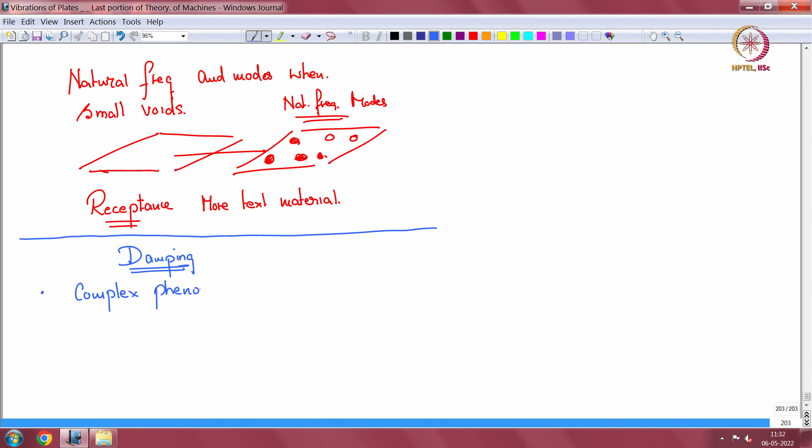Damping is a complicated, or complex, phenomenon. Let me tell you that this particular course which I am teaching, I myself learnt it from Professor Soedel. And when it came to this section on damping, he said that he came to study mechanics with the intent of figuring out what this damping phenomenon is. And then towards the end he concluded that it's a very complicated phenomenon, you cannot really nail it down. Yet it's part of all dynamical systems, and we deal with it using experiments, taking support from experiments and figuring out some empirical values. So I will put some thoughts together, because even in pure analytics you have to include some damping for meaningful results.

Now damping comes from many different directions, and you can have it coming from fluid viscosity. As you move in a high speed car you will have wind blowing against you, so there's kind of a drag that will take out energy from your mechanical system. And energy can be taken out at joints. When you have joints in a system you can have energy taken out. And you can have energy taken out from within the material.

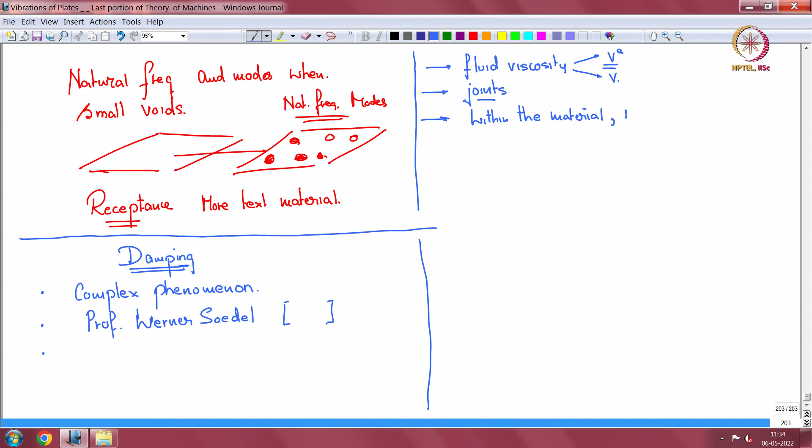Here itself there can be a nonlinear component where the damping is proportional to velocity square, or in the normal way proportional to velocity. Now there is damping within the material, which we call either internal damping or hysteretic damping.

So you have many sources of damping. The boundary conditions may not be very strict. The boundary is not strictly clamped or supported, so the boundary leaks into the neighboring material. So if a cantilever is not strictly clamped, there is energy flow into the wall. So there's many ways that damping occurs.

Now if you do a modal test, if you take a plate, suppose a simply supported plate, and you hit it with a hammer and measure it with an accelerometer, then you will see this in your frequency response function. You will see this sort of graph, plotted on a log scale. This is a frequency response function, and these are your resonances. These peaks are your resonances. The peak value and the way it rises, this region is damping dominated. This region around the peak is dominated by damping.

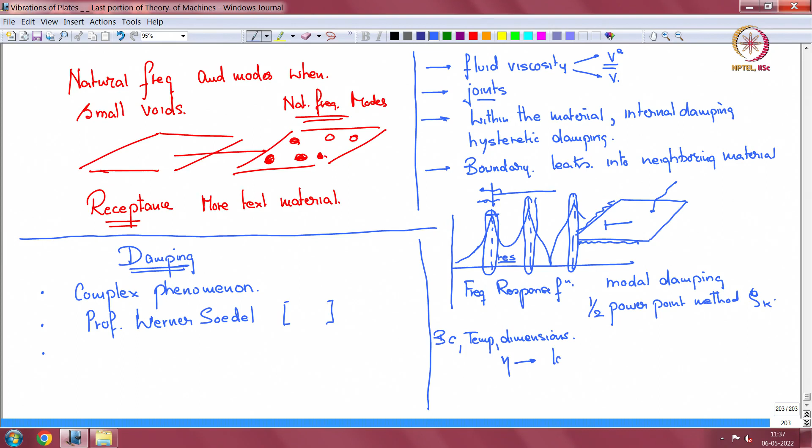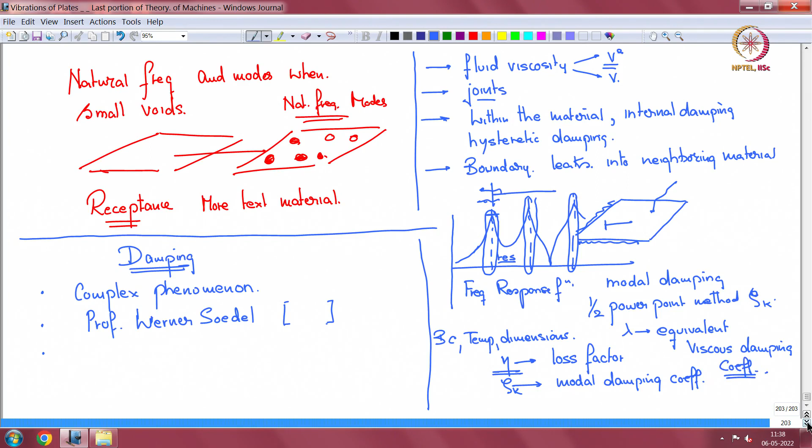Now, given that the nature of damping is very complicated, it comes from many sources, and it changes with boundary conditions, it changes with temperature, it changes with dimensions of your system. So given that, we will put some sense into how this internal damping is signified by a loss factor. Eta is typically used to denote a loss factor, whereas zeta k is typically used to denote modal damping coefficient. And in the text, lambda has been used as the equivalent viscous damping coefficient. So we will connect these three. This is nowhere an exhaustive presentation of damping, but we need to know something, so we will do that here.

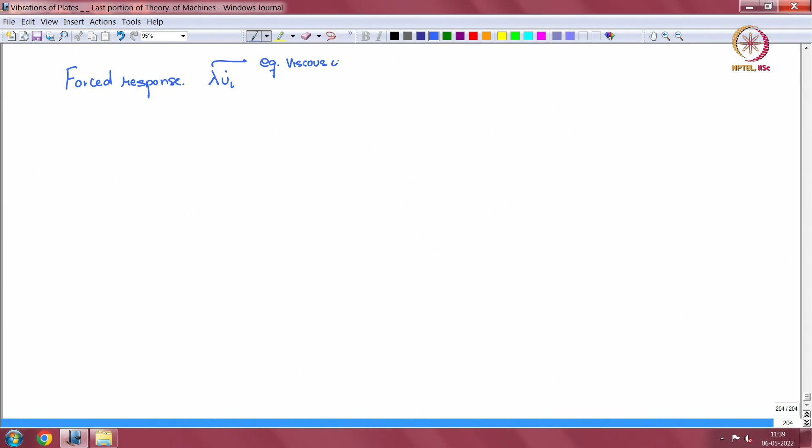We will connect the three. So in the forced response, when we looked at the forced response, we used the damping term as lambda times u i dot. So this is the equivalent viscous damping coefficient, and this is the velocity in the ith direction. So some fluid behavior is taking out the energy from your vibrating system, proportional to lambda times the velocity in each of the directions. That is the idea. And we are looking at harmonic motion.

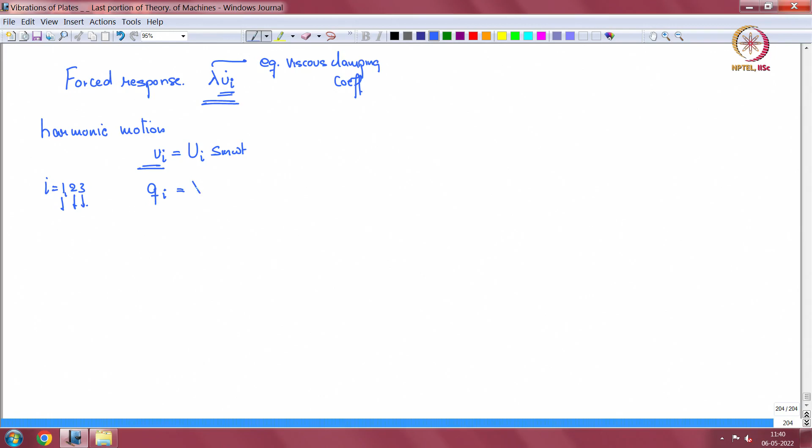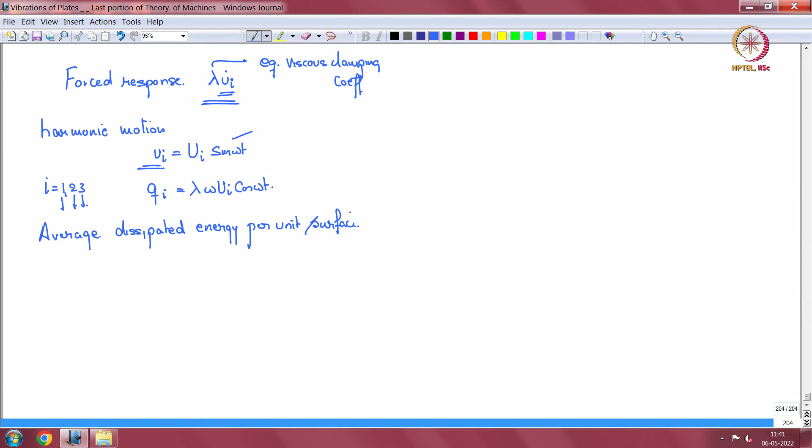We are looking at harmonic motion. Then u i is equal to some capital U i sin omega t. This is the displacement in the ith direction, i is 1, 2, 3. So alpha 1, alpha 2, alpha 3, back to square 1. Then what is the force? Force in the ith direction is lambda times the velocity, the derivative of this, which is lambda omega U i cos omega t. So what now is the average dissipated energy per unit surface area and per cycle, or in one cycle of vibration, because it is harmonic at omega.

So we denote by Ed the energy dissipated, per unit surface area. We have the area integral, summed in the three directions, and integrate over one cycle time period, then lambda and force into velocity.

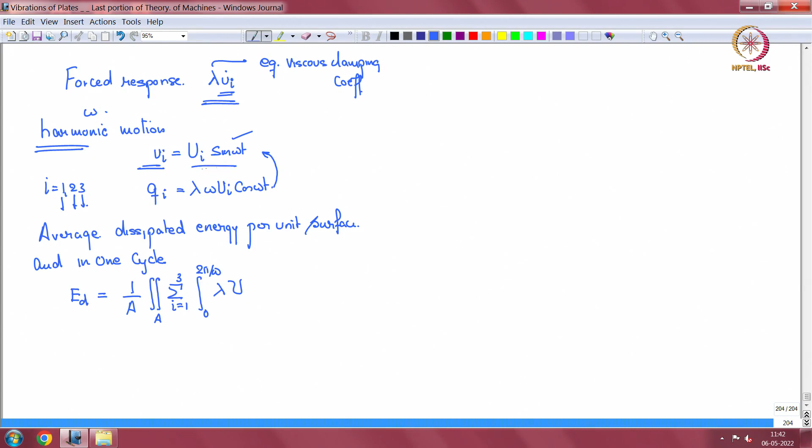Force into velocity is power. Power integrated over time is work. So lambda, we will have a squaring of this quantity: ui square omega square cos square omega t, integral over time, integral over surface area. A is the surface area of the shell.

If we carry this out, this will give you a half. So that gets me lambda pi, omega, 1 over A, integral over the surface area of u1 square plus u2 square plus u3 square.

This gives me 1/2 plus cos 2 omega t. Cos 2 omega t integrated goes to zero, so I have a 1/2 integrated over time. That gives me 2 pi by omega into half, which is pi by omega. So pi by omega takes out one omega, and I get pi lambda omega in front and an A in the denominator, and this area integral over area.

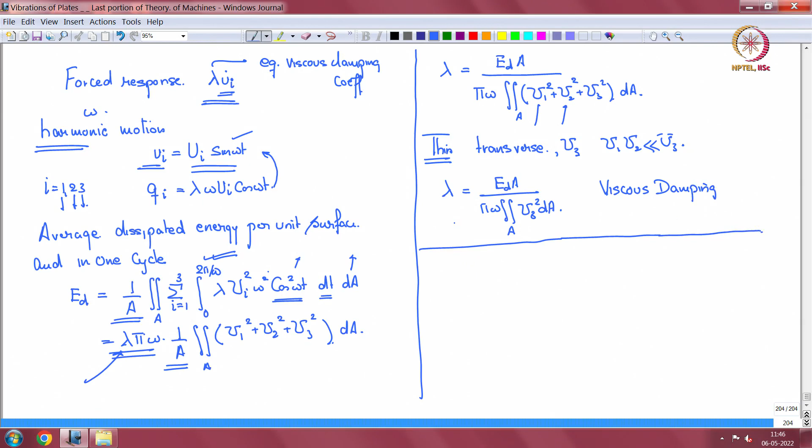So that's as far as what this lambda means, viscous damping, how we arrive at it, or what is the definition of lambda. Now we look at internal damping, or hysteretic damping.

That is, if you take a longitudinal specimen and subject it to oscillatory forces, what will happen is that the force and the displacement will not always be a straight line falling on top of each other. It will acquire a width, where the area of this now elliptic region is the energy lost in internal damping. So this area is equal to energy dissipated per cycle and volume.

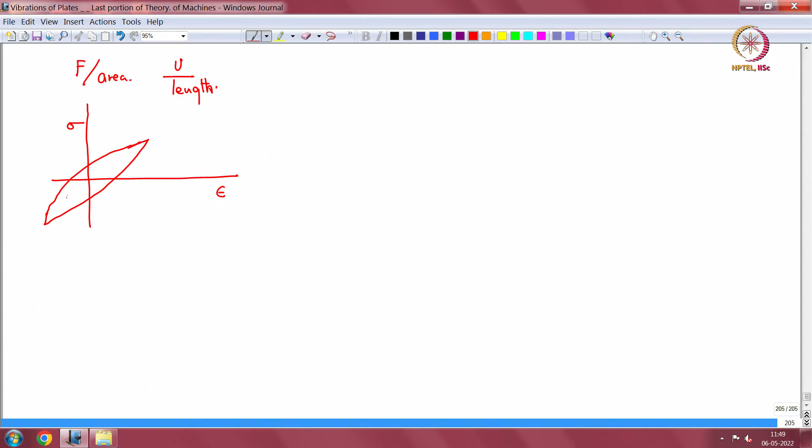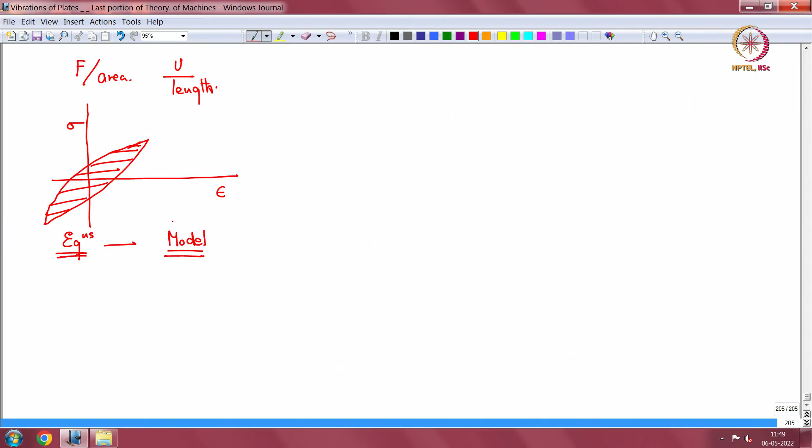Now if we put this in terms of equations, and try to develop a model which reproduces this behavior mathematically, to start with we have sigma, this is a 1D specimen, so sigma is E times epsilon for a rod.

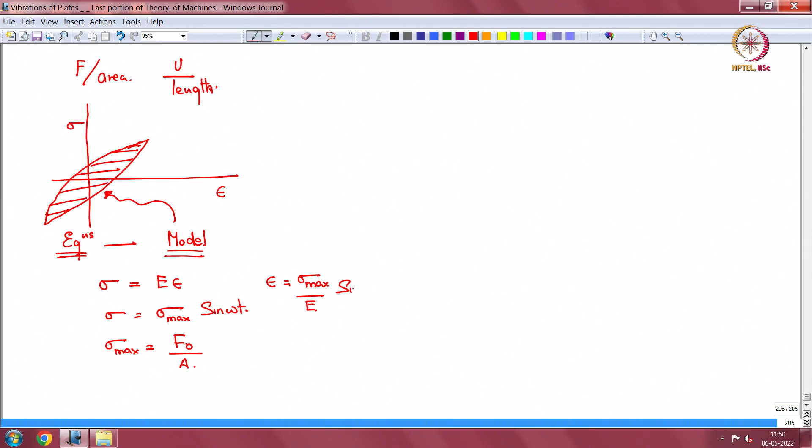Then sigma, we can say is some sigma max, oscillating at sin omega t. What is this sigma max? Sigma max is the max force by area of the specimen. So what is it now in terms of strain epsilon? It is sigma max divided by E, sin omega t.

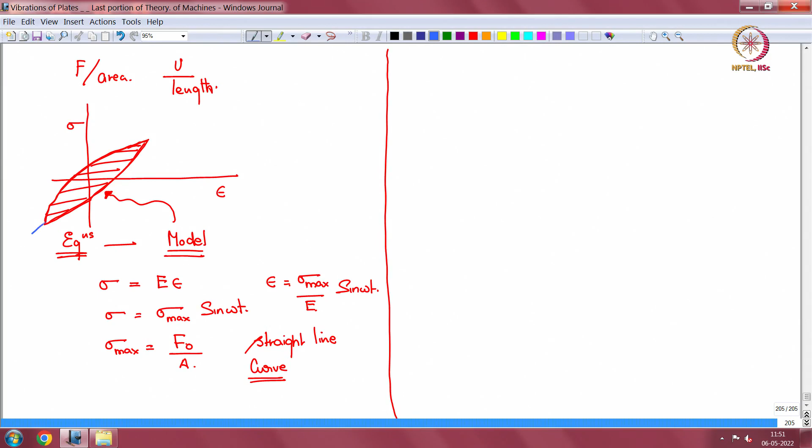This is what our Hooke's law suggests, but this gives graphically a straight line curve. So it won't give this bulged elliptic region, it will just give a straight line as you oscillate.

So now we have to develop a model. We have to develop a model. So what is that?

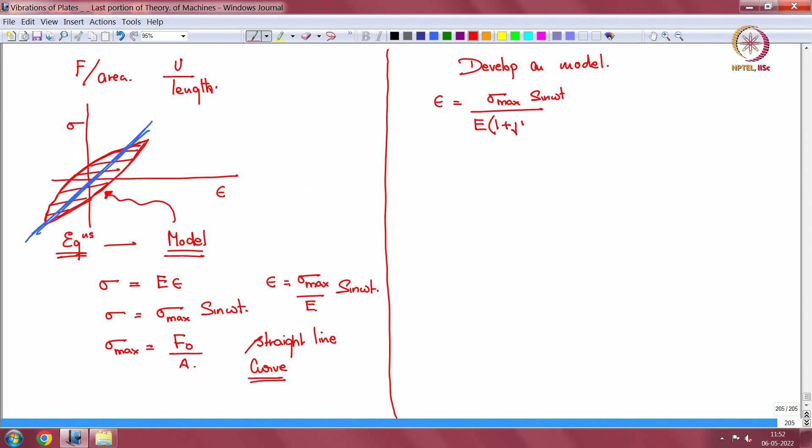What we do is we take epsilon, we take sigma max sine omega t, and we bring in a modulus which is complex. The Young's modulus is now complex. As a result, in the complex form, we get sigma max.

If we convert the denominator into magnitude, we get E times square root of 1 plus eta square, sine omega t minus phi. And what is phi? Phi is tan inverse eta. And it is known that eta is typically small, so phi is approximately equal to eta.

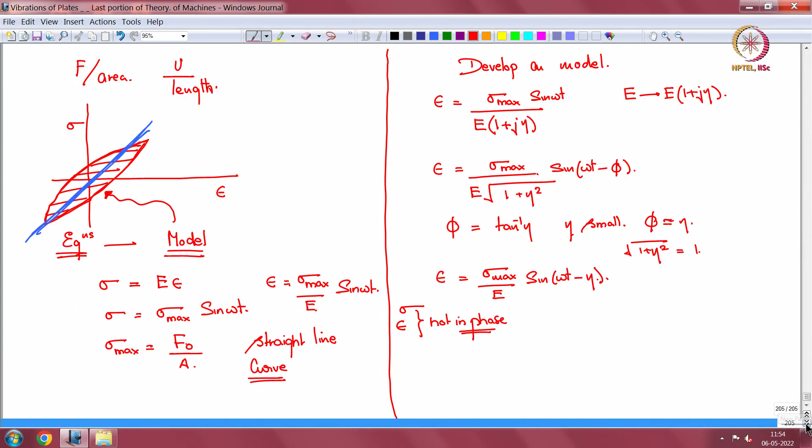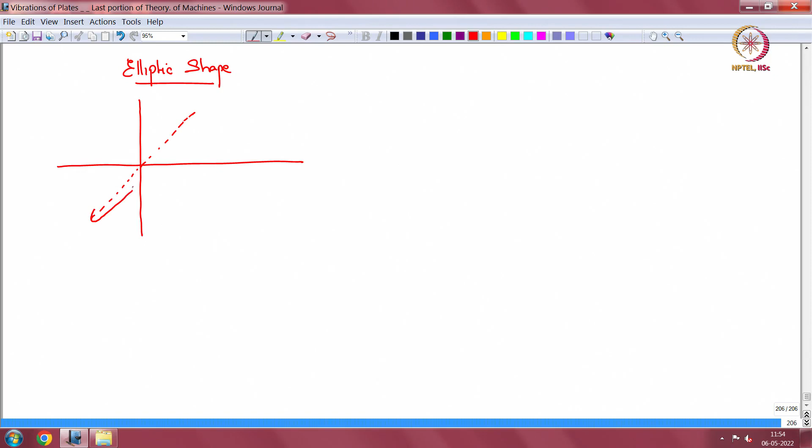So that square root of 1 plus eta square is taken as 1, in which case epsilon turns out to be sigma max over E, sine omega t minus eta. So what this now says is that sigma and epsilon are not in phase. So now what we get over here is we will get an ellipse, an elliptic shape, if we plot it.

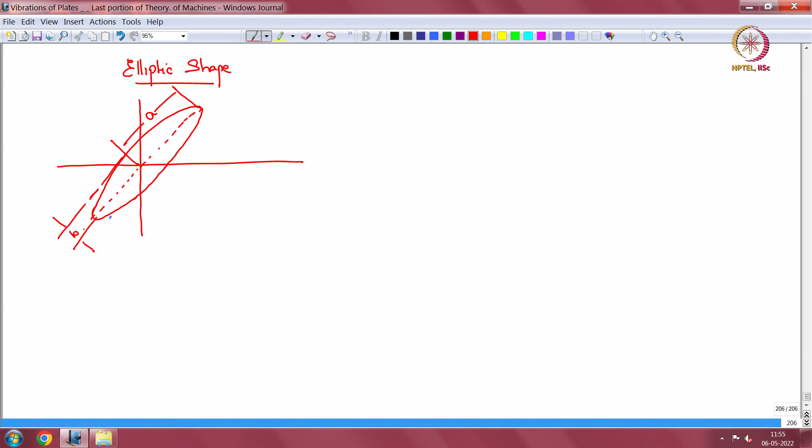So this is your half major axis, and this happens to be your half minor axis. Then this is your maximum sigma max, and this happens to be epsilon max. And this portion is your sigma max by E eta. And this angle is alpha.

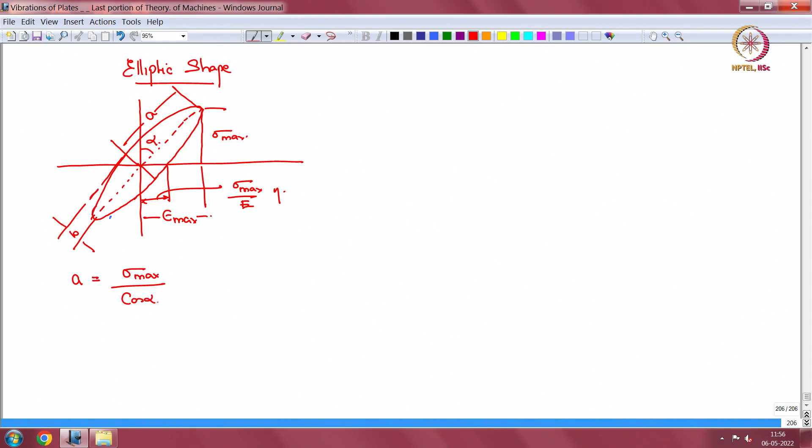Now what is the major axis? Half major axis will be sigma max over cos alpha, and the half minor axis is sigma max by E eta cos alpha.

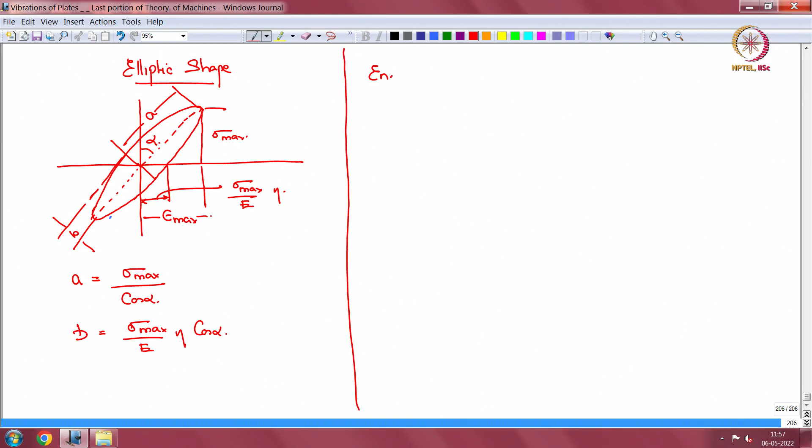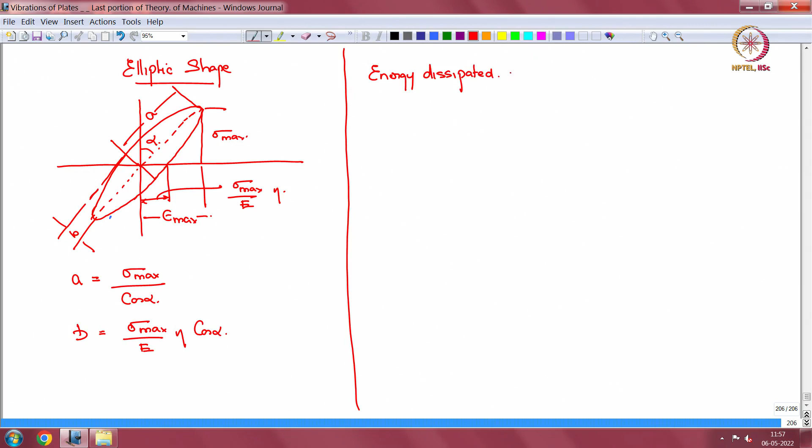And what is the area dissipated, energy dissipated? We said this was equal to the area of the ellipse, and it is energy dissipated per cycle and per volume. That is the area of the ellipse.

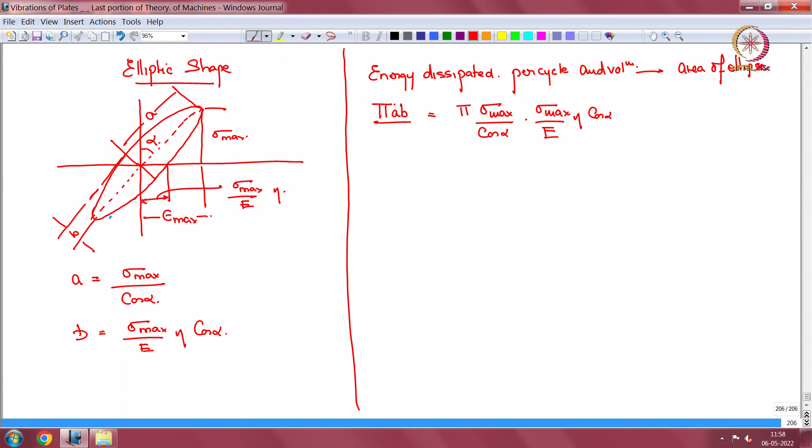And what is the area of the ellipse? It is pi AB, pi times A times B, which is equal to pi times sigma max by cos alpha into sigma max by E eta cos alpha, which is equal to pi by E sigma square max eta, or pi E epsilon square max eta. This is E1.

Don't confuse this E1 and this E - this is modulus. So this is per unit volume. So total dissipated in the volume is length into breadth into h into this quantity, pi E epsilon square max eta.

Now maximum strain energy, this is what is lost. So what is the maximum strain energy in the test specimen? What is U max? You have seen this when we did Hamilton's law, which is half epsilon max - this was per unit volume, so into LBH. So this is LBH, the volume, half E epsilon max squared.

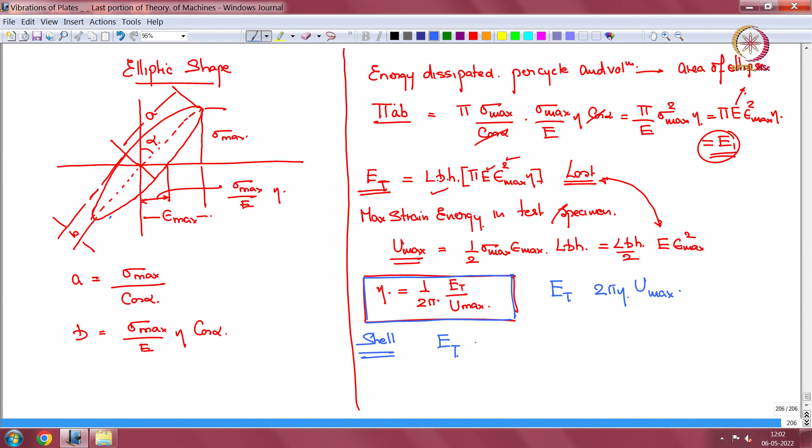So the dissipated energy is twice pi eta times the U max per unit cycle. So for the case of a shell also, this is a 1D specimen - for a shell also we extrapolate and say it is twice pi eta U max. U max is strain energy in the shell, peak strain energy in the shell.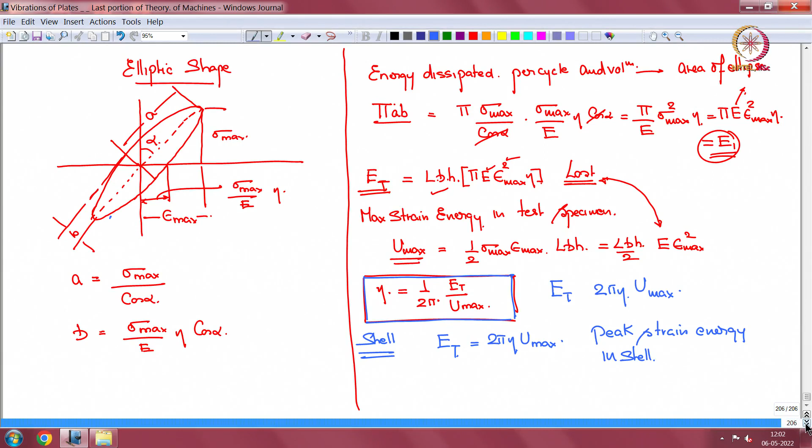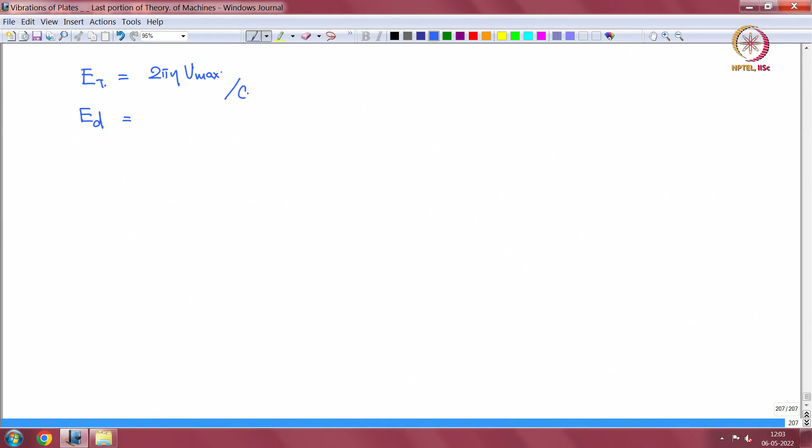Then the energy dissipated, so we have Et, is equal to twice pi eta U max. If you want to do it per unit cycle, per unit surface area, per cycle, per surface area, then we divide from here to here by surface area. So we get twice pi eta U max by A.

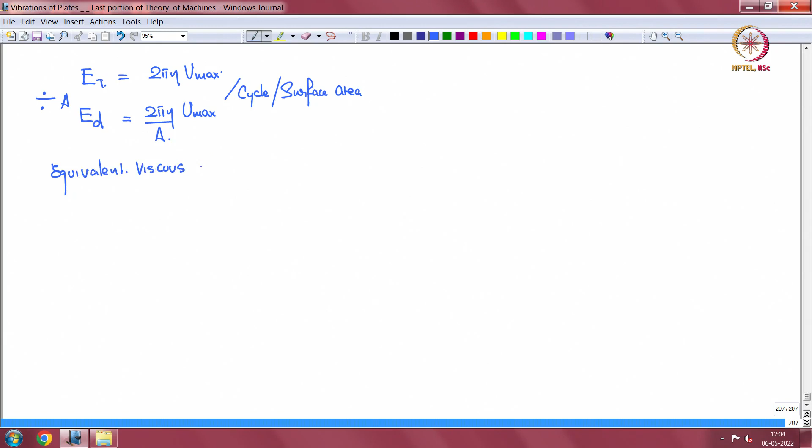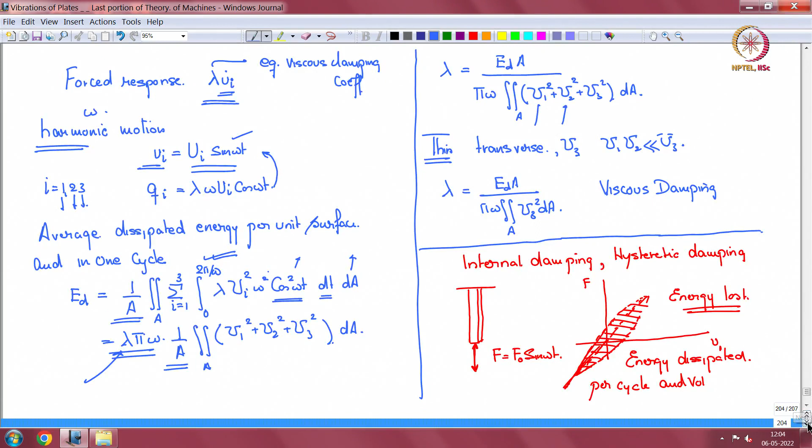So now the equivalent viscous damping coefficient - what did we do earlier? This, EdA by pi omega, that EdA by pi omega, integral over area of U1 square plus U2 square plus U3 square dA. That was equal to lambda. So now EdA is twice pi eta U max, divided by pi omega integral area, this term here, that is equal to lambda.

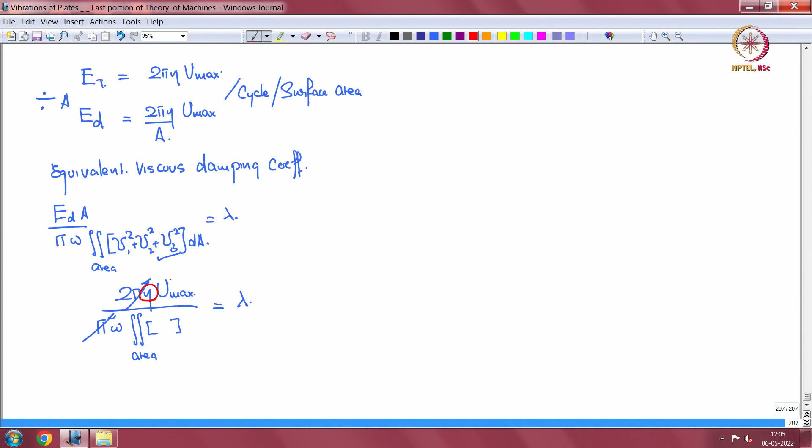So if we take this out, this is how lambda and eta connect. This is how the equivalent viscous damping coefficient and the loss factor connect.

Now if we remember Rayleigh's method, Rayleigh quotient, what was it? Omega k square was U max by rho h by 2, integral of U1 square plus U2 square plus U3 square dA.

So now what we have here is that from these two, from this and this, we can connect eta and lambda, and omega k. So that becomes lambda is equal to rho h, omega k square by omega into eta. Lambda by eta into omega is this quantity, lambda by eta into omega is equal to this quantity. That is also equal to omega square k into rho h.

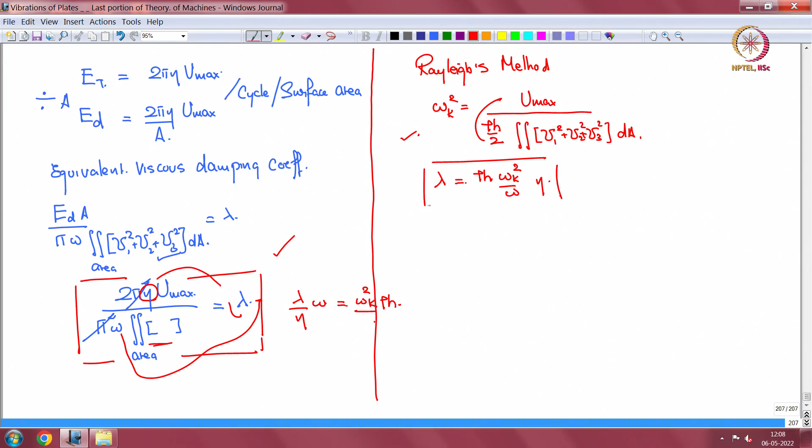Sorry, omega square k into rho h. Lambda divided by eta into omega over here is this twice U max by this integral. So that is equal to omega square k rho h if we bring 2 up here. So this is the connection, is also a connection.

Now how to connect this to the modal damping coefficient. So we did it using viscous damping coefficient. So if we bring in the loss factor, through the complex modulus, what now we get is in the equation of motion, we get 1 plus j eta Li of u, small u1 u2 u3, minus rho h ui double dot, is equal to minus qi star e to the power j omega t.